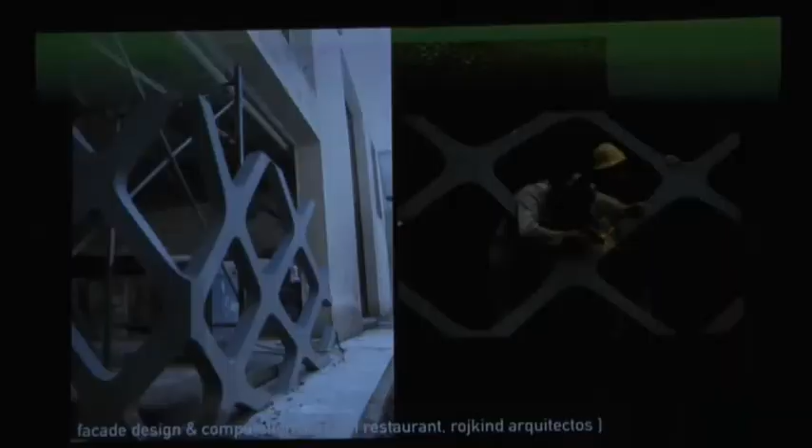For contrast, I'm showing you briefly here a few projects we've done consulting to Rojkind Arquitectos on, more geometrically focused scripts. In this case, these are developed by algorithms, but these algorithms could be interchangeable for parametric models. I'm not actually talking about this stuff today.

So these models are operative in the sense that they design through the model. They find a way where they can generate form, space, while embodying certain criteria, in this case structure.

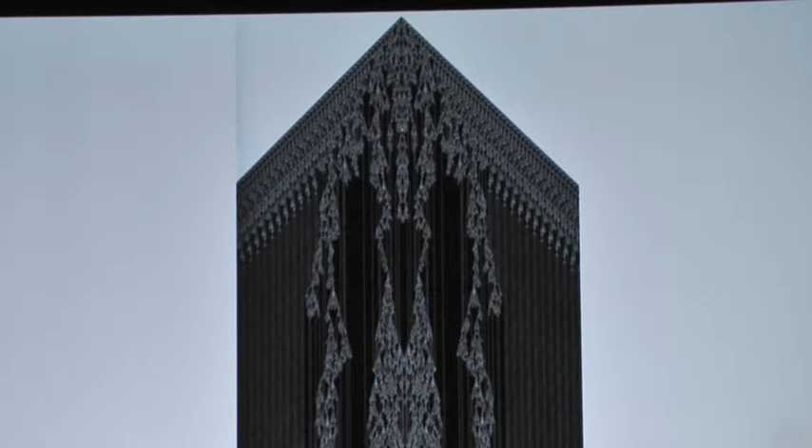When architects move towards computation, often computation is seen as a way of drafting. We're more interested in qualitative reasons for using computation, such as Stephen Wolfram. Here you look at simple rules of cellular automata, generating unpredictable results, or in this case emergence, a result that has a coherent order at a larger scale. This is in tune with the forefathers of computing.

People like Alan Turing, with his morphogenesis, demonstrate self-organization. Along with John von Neumann, they are literally the godfathers of the modern-day computer you use. Both advocated for artificial life being possible through computation. They're not interested in solving simple calculations; they're actually demonstrating that there is something creative that can be undertaken through simple procedural rule sets.

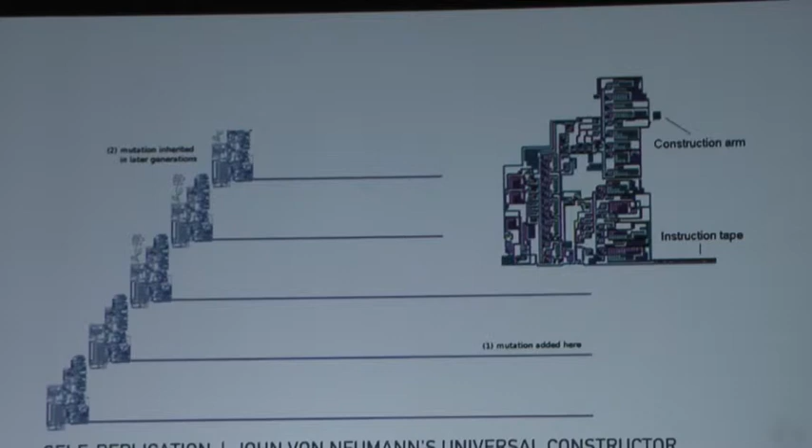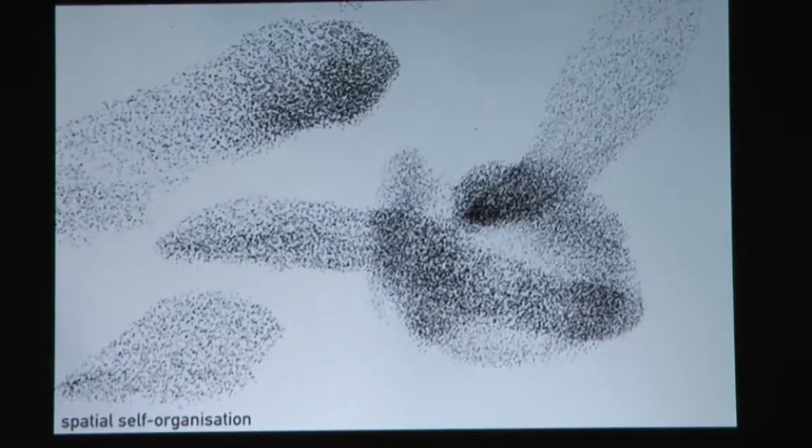The way we tend to work is more in ways where a larger organization or some generative effect is created through local or simple rules, such as you can see here. Birds operate that way, such as in Craig Reynolds' Boids algorithm. Or Eric Bonabeau and Guy Theraulaz have talked about how termites construct mounds through simple local rules as well. So these types of algorithms, I call them - the best way to categorize them is that they are event-driven.

Why I think that's really useful for design is that, first of all, it's systemically open. You can keep adding relationships, so you can deal with practical problems as well as design ones. But also, being event-driven, it's easy to use these kinds of algorithms creatively because it's a little bit intuitive. You construct events, and each event constructs something that gives rise to an effect or a characteristic in a project.

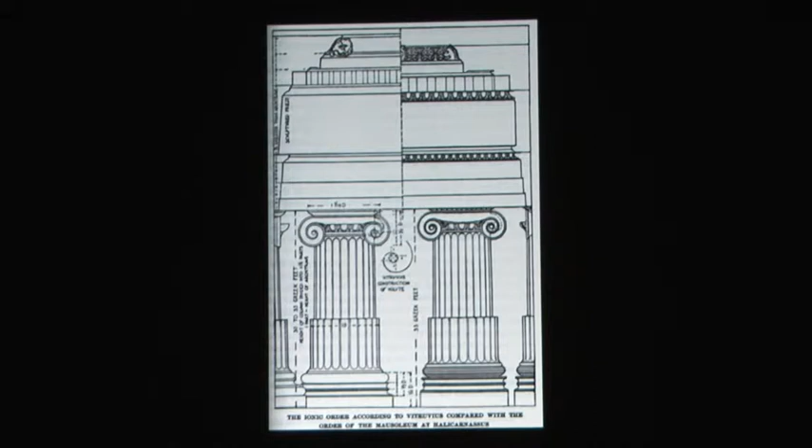So this can challenge the interrelationships of architectural elements and concepts such as proportion, arguing more for rethinking architectural production as something towards that of a complex organism.

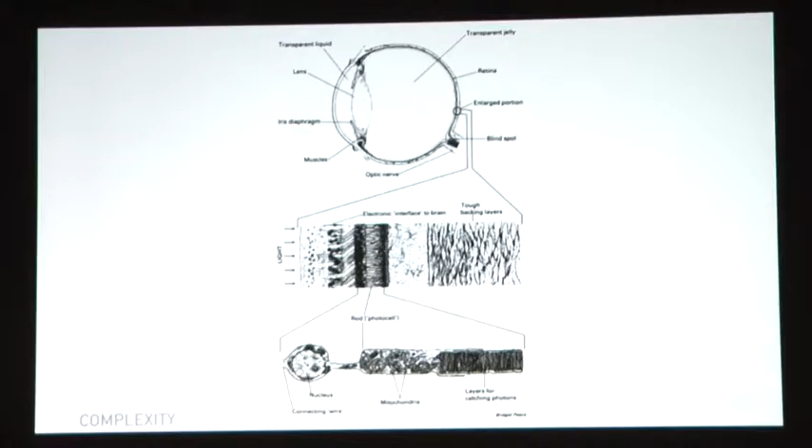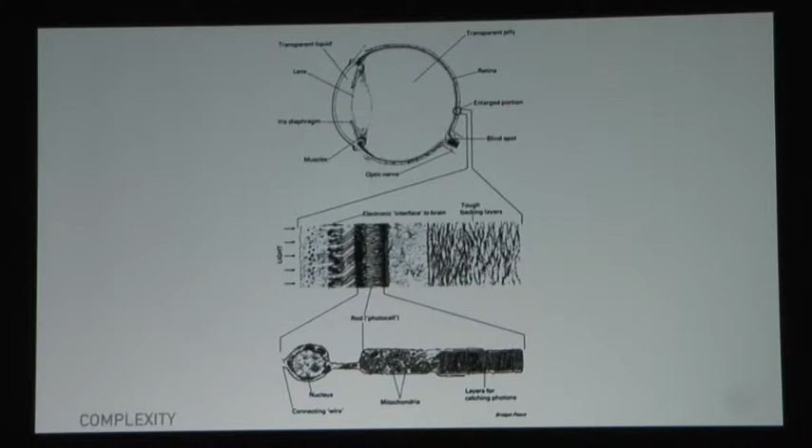Rather than thinking of complexity such as Venturi's idea of contradiction, or as something that's complex to construct, like Gehry, we think of complexity more on a number of terms, such as Richard Dawkins talking about complex organs such as the eye, being things created from heterogeneous sets of parts that perform a useful function. So they're complex because they do something. A car would operate in a similar way in that definition.

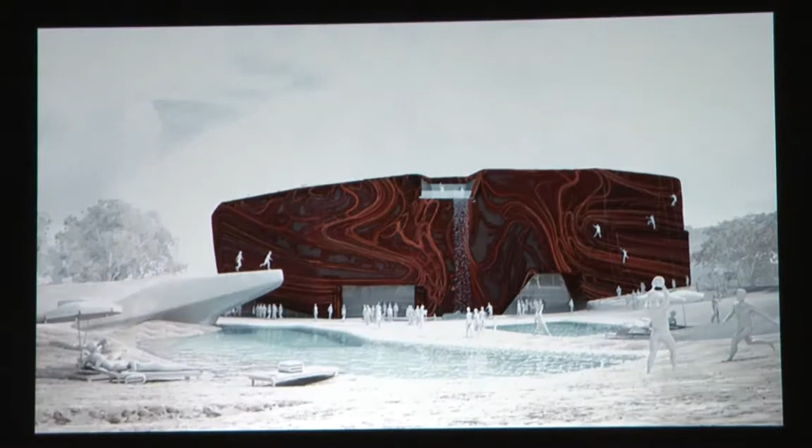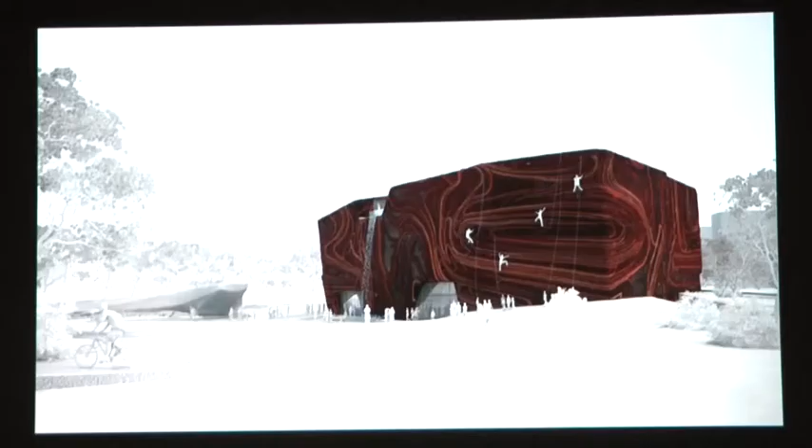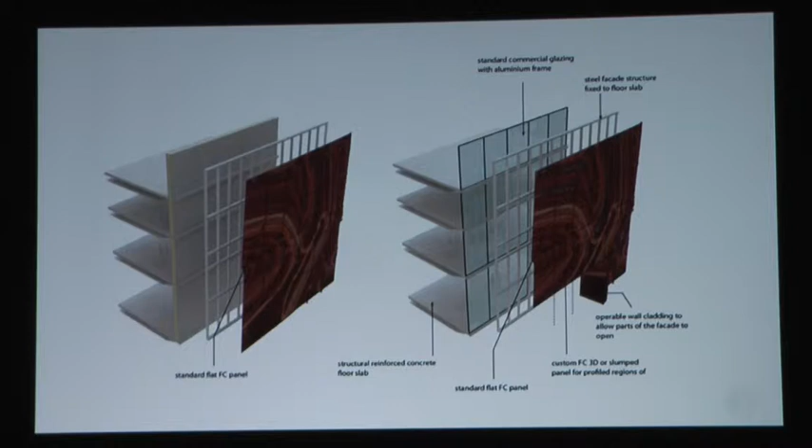Some of this is purely visual. This is a recent example, a very budget-driven competition in Bulgaria for a rock climbing center, where the idea was just to create a rock climbing terrain that had a sense of volume to it. Rather than feel that it was just applied pattern, it was almost as if you'd carved out the building from a solid. But it's really just a game of trickery with FC sheet, with the occasional panel being three-dimensional and sometimes being perforated to incorporate glazing behind.

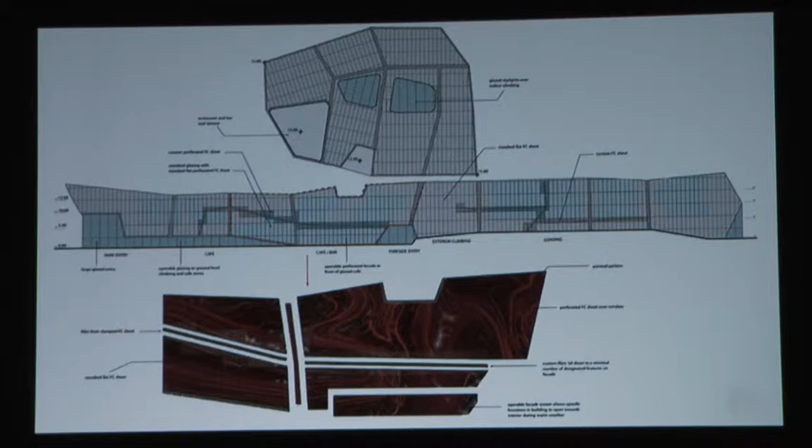So in this case, complexity is just a visual thing, but it's generated through very simple rules and rationalized into something that can be fabricated in a relatively economical way - well, per se, it's still a little bit expensive. And in this kind of condition, pattern becomes something that is related to surface but came after surface. And then continues - you'll see, for instance, even the facade carries on some of the same patterning.

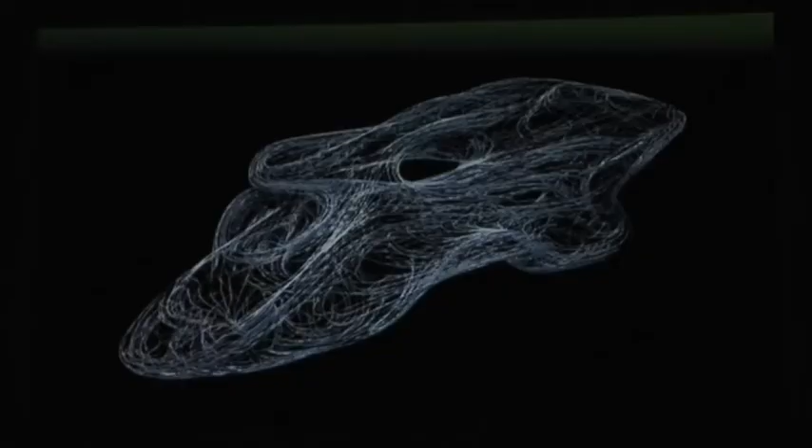Another project that uses a similar technique is the National Art Museum of China, which we did in collaboration with Studio Shupe. This was written through a behavioral algorithm, giving agency to curves that essentially wrap a series of gallery volumes. It's a strange process - the building had a 3D model, but it was constantly going back and forth between simulation and 3D model. Basically, it's defined through a series of autonomous particles in space that move, like agents. We were able to control a series of local connections through that, defining a glazing structure intrinsically related in its formation to the form and also to the envelope.

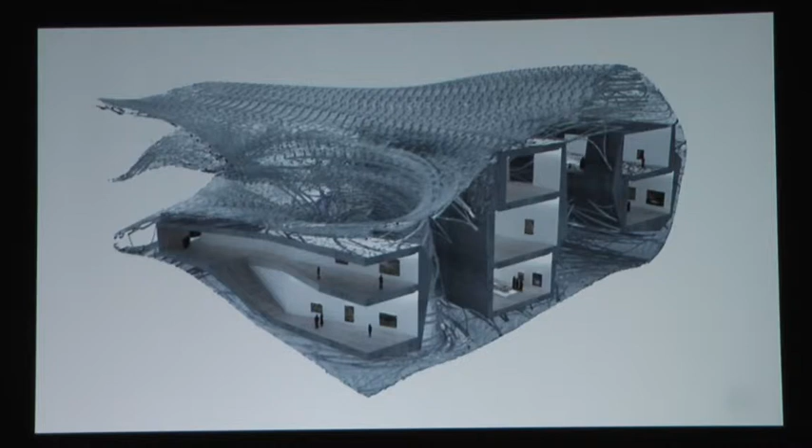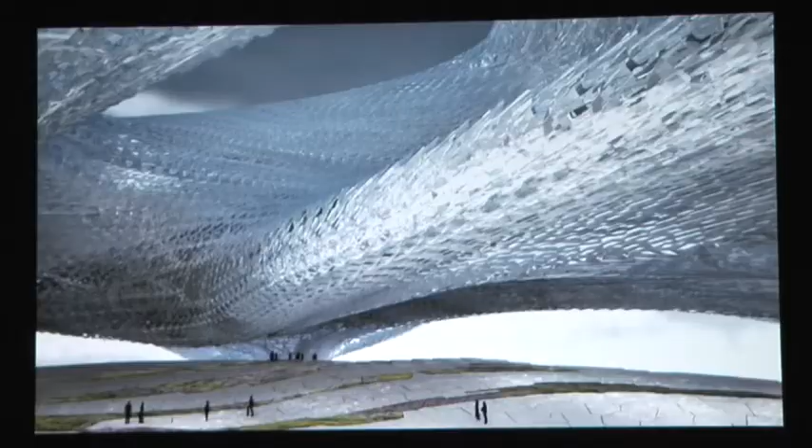What you see here is a 240-meter long building. The separation of podium and building came from Shupe. What we were trying to do was give the glazing outline a series of turbulence and variation that broke down that scale a little. This gives you an impression of the scale - you have quite large gallery volumes shrouded in glass tiles. Each tile is the same size and shape, just offset differently. There's a series of vortexes that define topological manifolds, or holes, through the geometry to enable light to get down to the podium below.

This leads into other ways we work through projects using self-organization. It's a similar thing - what we're interested in here is a series of very simple geometries. Basically, it's an agent with a body attached to it, a geometrical body, but the body self-organizing in time relative to the spatial orientation of the agent. What happens is you actually get a huge difference over time.

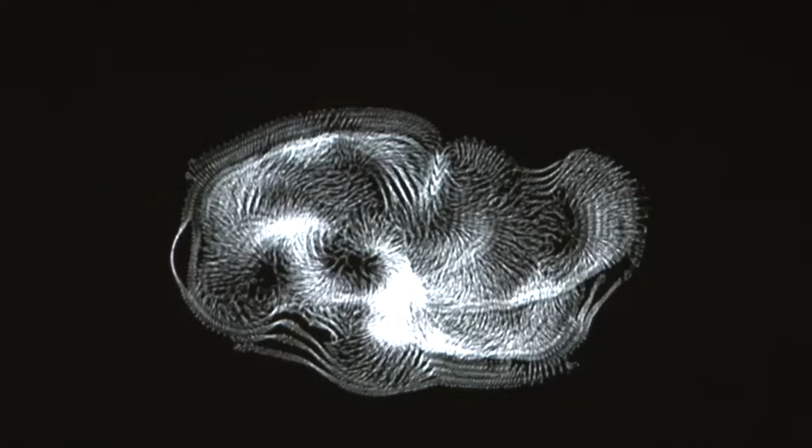There's an interest in the aesthetic of complexity, in the sense that it can bridge multiple scales of effect, and it's not reducible to the linear gradients you see apparent in other kinds of things such as parametric models, which always verge on a band of variation that's predefined.

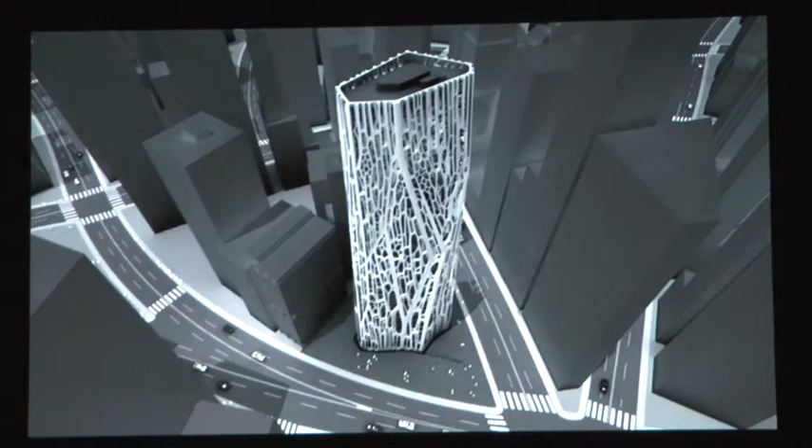We were looking at something similar here with this concrete exoskeleton, where on one hand you have a structural system based on redundancy. It's not about getting a structure to hit the ground by the most direct route - it's about giving multiple routes for any structural loading to get to the ground. On the other hand, it's also about ornament and formal articulation, trying to make these things inseparable.

Part of that project was relatively rational to construct, with the exception of that thickened area, which you can basically form with void formers from two sides. So it looks more complicated than it was actually aimed to be constructed, unlike this version.

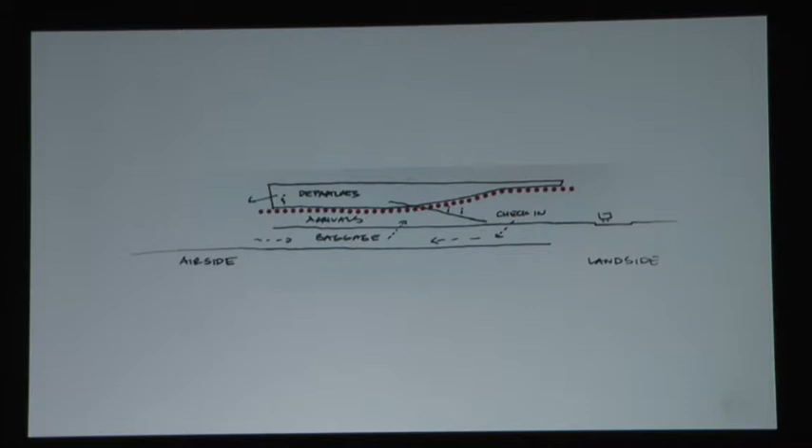This was an airport that we collaborated with Buro Happold on, where we tried to emphasize the ceiling between arrivals and departures as the priority of the airport, because we felt that in most airports, arriving passengers get neglected since the airport is normally a big roof structure you only see from the top floor. In this case, the roof has a thickening to it, and you pass up into the roof from the check-in, so the check-in is on the same level as the arrival. Then you ascend through the belly of the roof into the retail area.

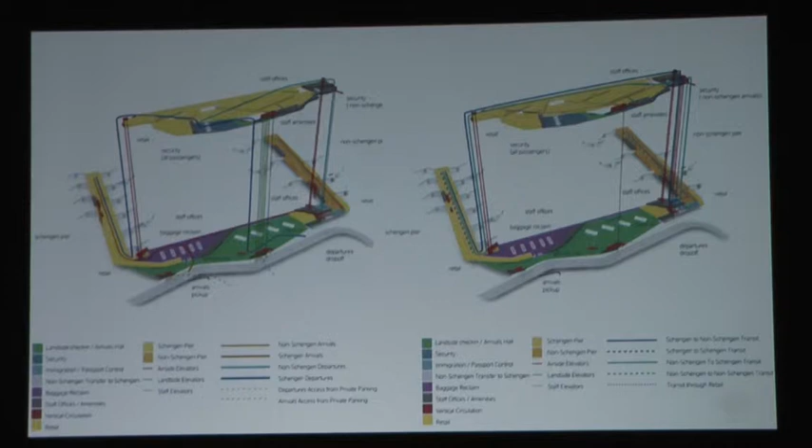It's a little bit more complicated than a normal airport, but the airport planners were happy that it was efficient enough, and it leaves unobstructed views to planes from pretty much anywhere on the arrival and check-in level.

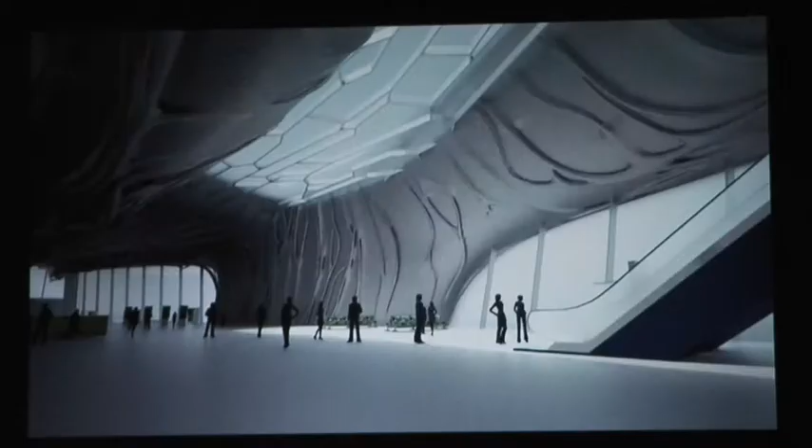And this kind of roof structure, in this case, what we're trying to do is, once again, fuse ornament and structure within one algorithm. So you have a series of strands, like with tens of thousands of agents. Basically, the roof is defined as a fibrous network, and it makes and breaks connections in real time relative to structural loading on the surface.

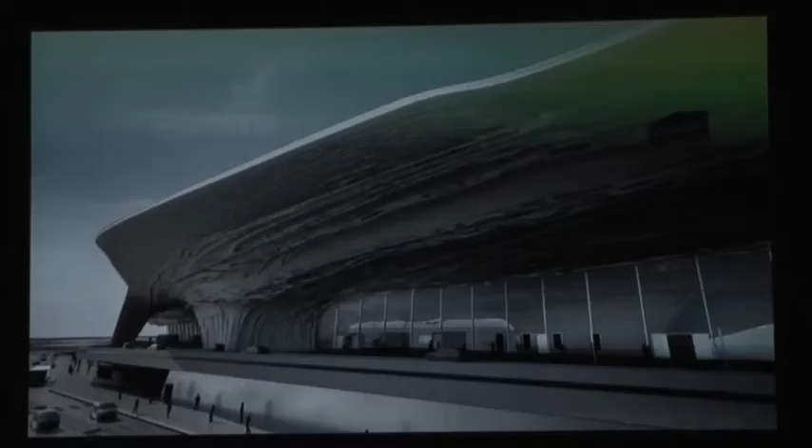So it's not optimal structure. It's actually a structure that's been predefined by a certain spatial formal condition that we wanted, and then it has to resolve itself structurally within those confines. So that's why it doesn't look like an optimal structure, but all the excess you see there is structural.

So what we're trying to do there is, once again, try to not separate ornament from structure in such a way that, if you take away the ornament, you've taken away the structure.

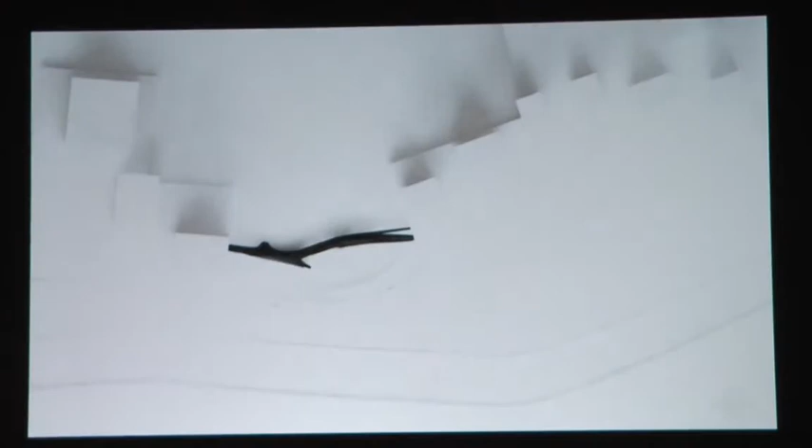Another example of this, but a little bit more smooth perhaps, is a pedestrian bridge in Sao Paulo, where we were trying to convince the client - it looks like this project won't happen now - but we were trying to convince the client to go with carbon fiber, or at least a fiber reinforced plastic, because there have been a lot of case studies done on where you could save a lot of money.

So first of all, you decrease the weight, which decreases the amount of concrete needed in pier footings. You decrease the size of cranes needed, transport, and then maintenance costs is a real potential financial saver. So you save a lot of money on maintenance costs compared to steel or concrete bridges.

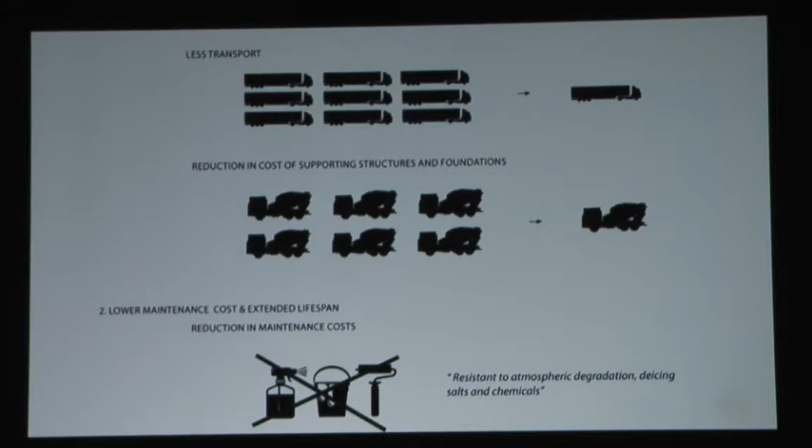But our real interest in this was to be able to think about how the formal condition, if you were to make it in carbon fiber, formal would become structural rather than just cosmetic. And topology could also become something that enables structure to be more efficient. So basically, how do you get more expressive design potential while at the same time embedding structure?

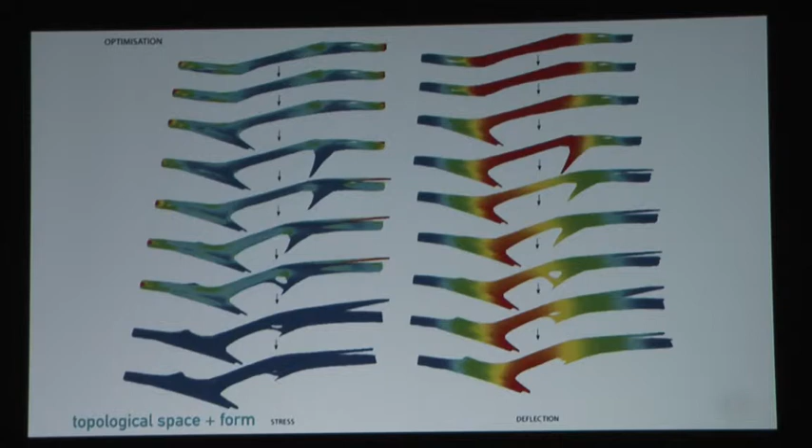So we start with a tube, and as we gain topological complexity, we gain structural fitness. And as we do that, we also articulate through micro ribbing on the surface. We start to also increase the structural fitness. So the more crazy the geometry, the less material we use.

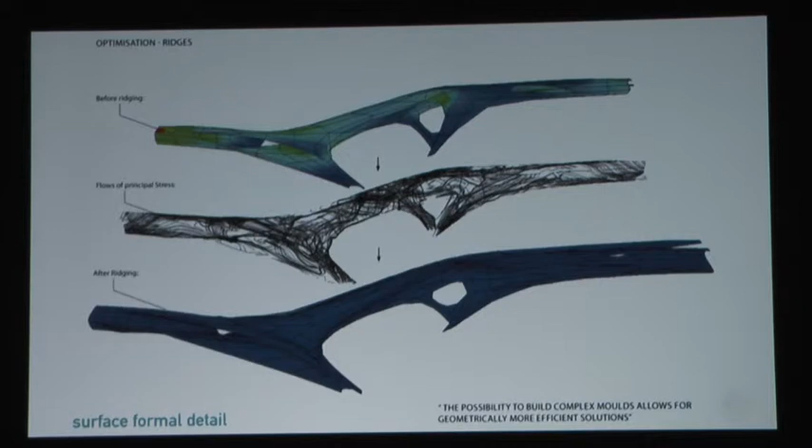And we start to then take things like stress lines as articulation value. So we could argue that more complexity of geometry led to more material efficiency. That's the bridge.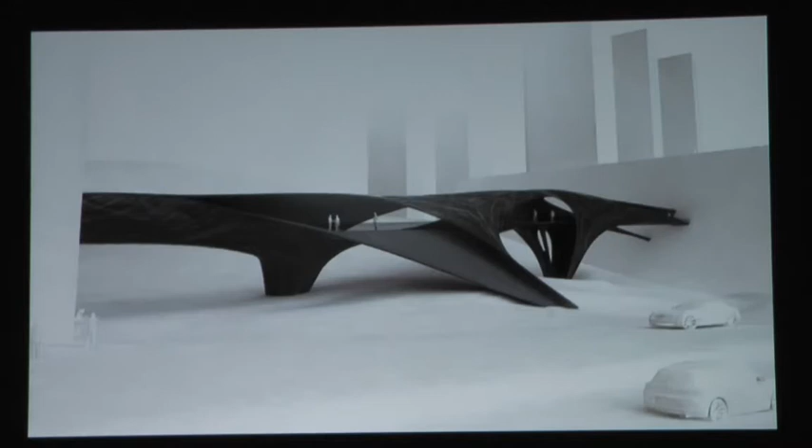It was a pedestrian bridge to connect a shopping mall with car parking space, and the car park was in a commercial office tower. But yeah, so it's actually quite thin and efficient. It's trying to increase its surface area and volume and depth at various times, but at the same time, there's nothing there that doesn't necessarily work, either for space or for structure.

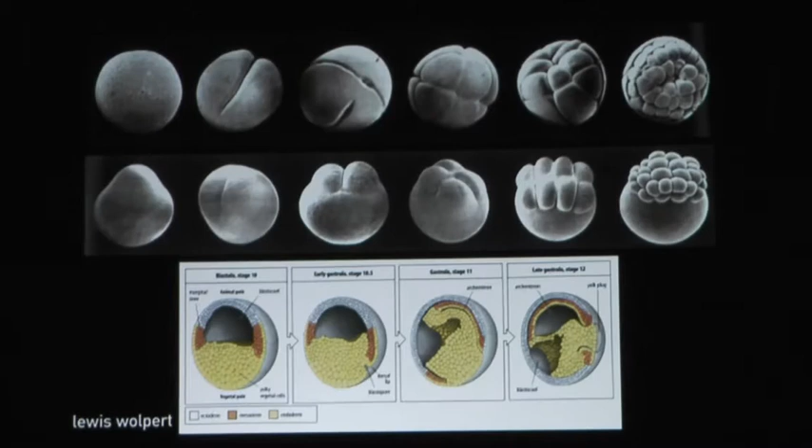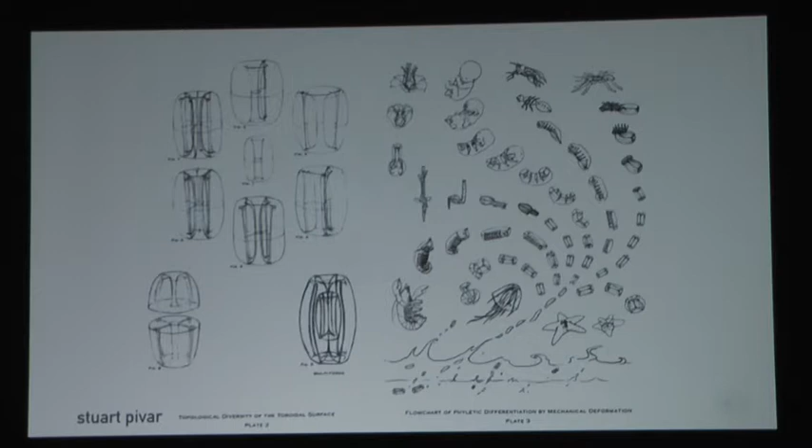So this idea of topology led also to a series of investigations, and it's tied to how we can generate topology. So we're looking at people like Lewis Wolpert, who does developmental biology, and basically embryogenesis is a topological process. We're also looking at Stuart Pivar, who has these crazy diagrams where he tries to argue that you can almost generate any vertebrate from a base topology of a double torus.

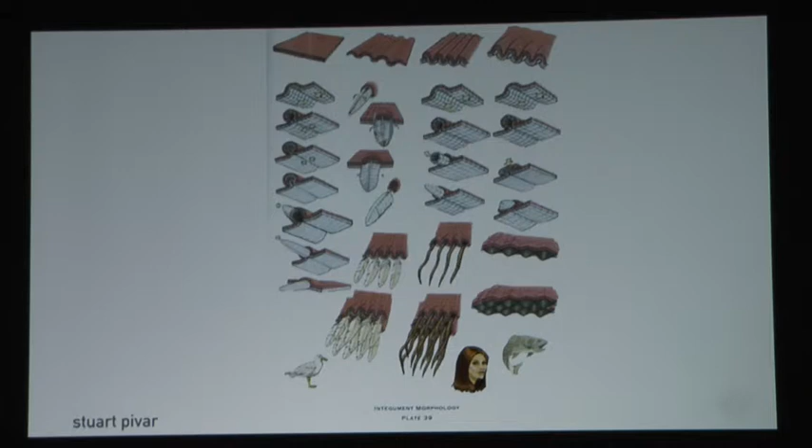And he talks about how you can generate all the articulation of a vertebrate through events that just occur repetitively as a series of procedures.

So going back to looking at swarm systems, like agent-based systems are essentially attraction and repulsion at their most simple, right? So if you have them attract completely, they collapse like a black hole. But if you give them a balance, they start to define something that creates what we call dynamic stability.

Whereas spring systems, for instance dynamic relaxation, they do become near equilibrium condition. The sphere you saw was dynamically stable.

We can also undertake topological modification, where topology is something that arises through the negotiation of a self-organizing system, in this case agents, and where color in this case is describing the surface's knowledge of what it is locally. This surface has no global knowledge, it doesn't know what it's supposed to do, but the local nodes work out whether they're on an edge or whether their job is to create a tube or anything like that.

So this is about constructing rules. Like when you see the bridge form before, there's an event-driven rule that was written to say a few nodes die, a few other nodes reach out and connect somewhere, and then there's a whole other class of nodes that have different roles to play that have to do their job to make that thing happen.

So you're talking about a community that has a series of teams with different tasks. That's what that surface is.

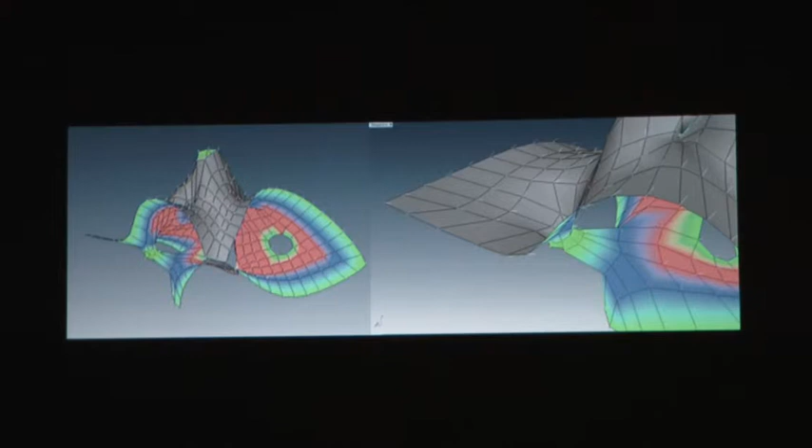And for instance, after writing that code, I ran it in a few workshops where you can see some examples of something transforming in time. And you can see in this video that's playing, we were trying to basically conceive of a series of events that could happen in time, that one thing would happen in response to the thing before it.

So this is just a snippet of a whole lot of videos, but it's trying to think of the generative system as something that's more of an ecology of sorts, where multiple things are negotiating in response to each other. There's no design goal for that.

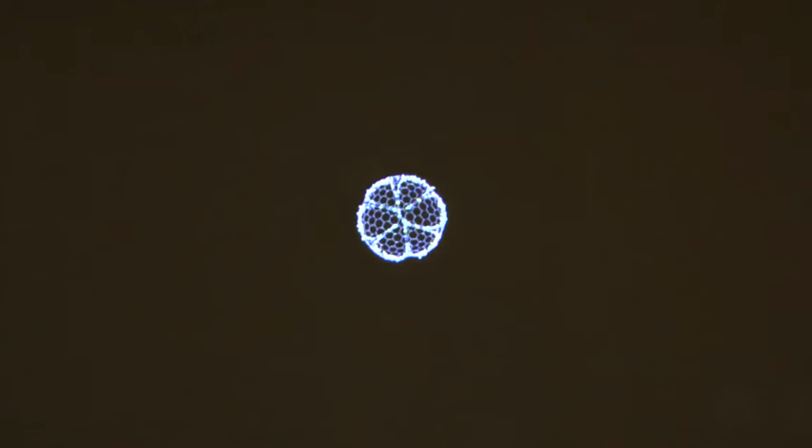But if you take that, I think there's another version of that here. You can see another one here. So basically, every time you see a color change, there's a rule change happening, and everything's just locally organized. Nothing has any global conditioning. But in this case, there's an attempt to try to control some form of geometry through it.

And it's just constructing one rule after the other.

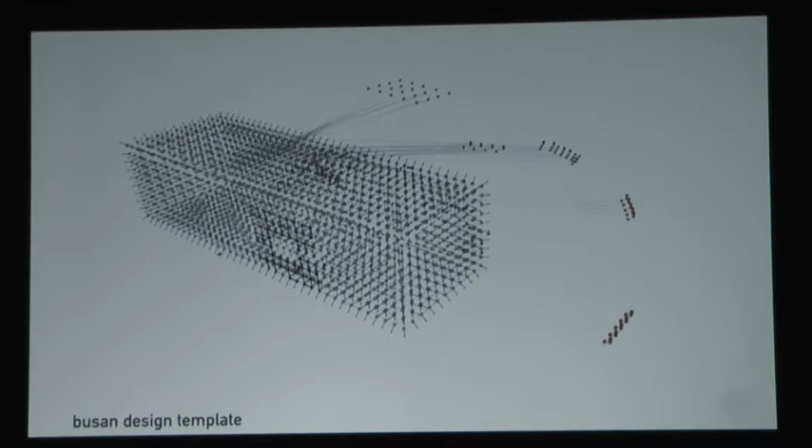So using that kind of methodology in a project, we can go completely bottom up. We've done that before, but we can also put in some top-down constraints or some starting conditions. So in this case, this is what I call a design template. It's like the input in which to generate something. And in this case, that's the result.

It's a process similar to embryogenesis. The template starts to transform, subdivide, it folds in on itself, it bridges topologically, it does all these strange things, and as it does so, it undergoes a lot of changes.

It looks quite deterministic when you see it, but this project was a pain in the ass. This took 3,000 simulations. You're going to hate me for saying that, it's not worth it when you see it. But 3,000 simulations, each time writing different code, as well as changing design templates and things.

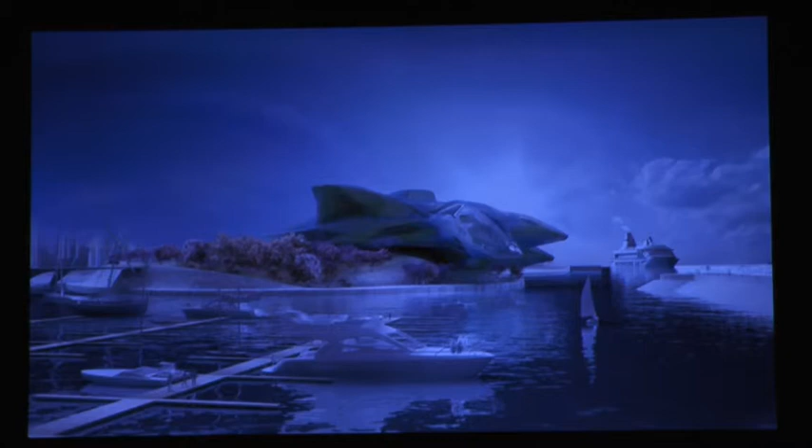But the thing about it is that all those details you see, like the collarbone-like things on the left, or the ridge on the top, they're intrinsic to the formation of the overall result. They're not something that we had a model of the geometry and then said, okay, let's add a ridge here, a collarbone here, or whatever. Not that that would be a problem, but I think the interesting thing is it's actually those things that are the telltale signs of how it formed in the first place.

Because what happens is when a series of agents or nodes on the surface kind of pinch like that, that's caused a tightening that's caused the whole surface to pull in a very particular way. So it's actually, they're the signs of something local that happened.

In this project, the idea was a ceramic skin that would have glazing progressively transferring across the water, like you can see here.

But the main interest in this project, more an exploration of the research, was the character of the surface in relation to the way it was formed—things like muscular toning versus tendon-like qualities.

And these things, or in this case the auditorium, which unfortunately looks a bit too Zaha—anyway, the point is the opening there caused a tension that sucked the whole surface in, and that's why you see all the wrinkles. It's all part of how it was generated. It was actually supposed to look a bit like this.

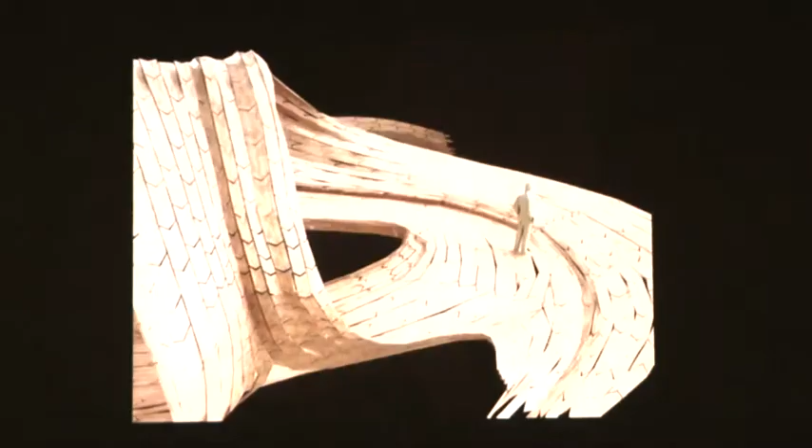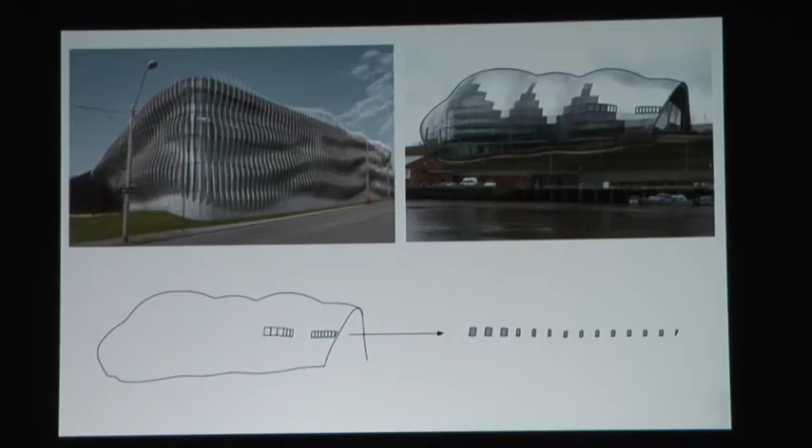Before we had glass tiles, we were also looking at metal tiles or metal cladding elements, trying to challenge this problem where you have a weird surface and have to break it into lots of different parts.

We were thinking more about the fact that you can have interesting difference with parts that are all the same. I ran a fabrication studio in St. Louis where we took that concept.

We were looking at structural surfaces by people like Musmeci, or Frei Otto or Candela, and critiquing them on the fact that although they perform well structurally, there's something quite reductivist about them as a design—I would argue there's a lack of expression in them.

So it's more interested in how you mess with these properties, like how you mix post-tension compression with cable net suspension and drapery—how do you put a bit of Bernini into Frei Otto, in a sense.

Think about how materiality can be something that is just local—not like, let's make something really supple so it can't do anything, it's completely useless, and then organize it so that it does something useful.

So this is the design drawing for this installation experiment. It's the only drawing we need, and it describes how one element is connected to another element.

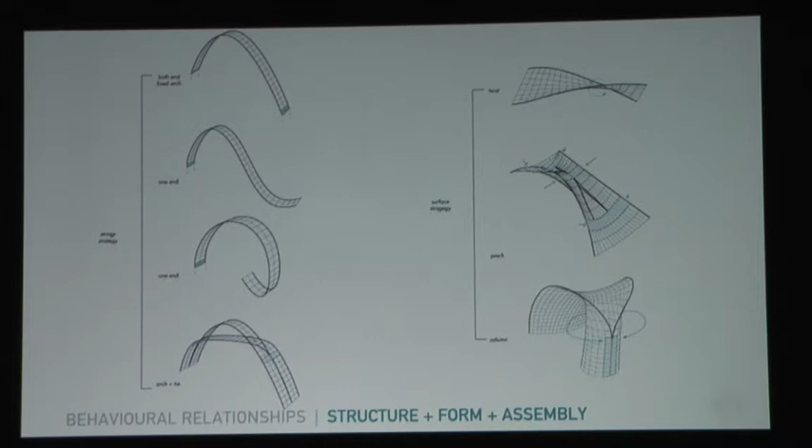It actually translates into procedures like these ones. Basically the whole thing is like the thing in the bottom right, where when it forms a tube it stands up, and when it doesn't it collapses, because all the junctions are loose in every direction.

So we started by looking at how we could create a ball joint in one direction, and a slotted connection in the other. This is two axes of cables with plaster models just as a prototype, so we could start testing the same elements doing all kinds of strange things.

So here you see they go from surface to strand, from tube to surface to strand, and at times they can hold themselves up, other times they become completely floppy.

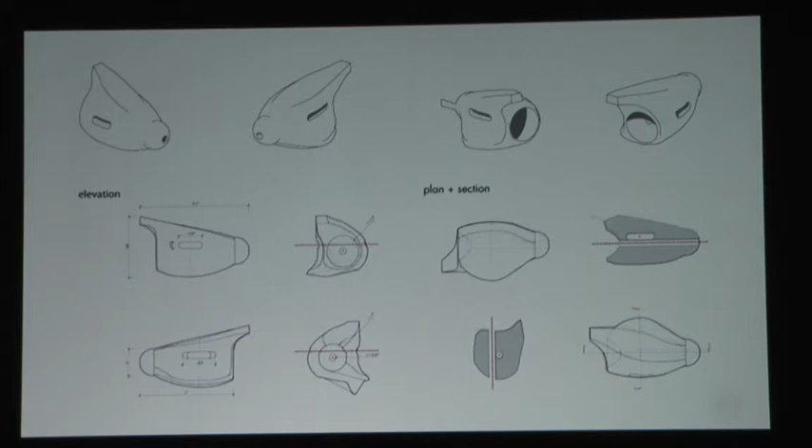To do this kind of thing, the actual base geometry became important. What we could define there was what would allow these things to happen or not happen—so there's a series of curvatures and slots that allow for different rotations to occur.

This is the final pieces, and you can see here that they interlock, and their curvature means that anytime they slide, they're going to reorientate in angles as well—so they're always shifting in orientation, which is deliberate.

And that's the final thing. It's a little bit ugly at certain angles, so I'm curating these photographs.

But you can kind of see, as I said before, this has no structural qualities—that's not the point so much. It's incredibly heavy and it was difficult to build, but it is what it is—the assembly is the creative act.

So assembly here becomes generative—if you connect them in a slightly different way, you would get a different result.

And you can see where it collapses on the other side when you open it up.

This principle was looked into in a slightly different way in the Helsinki Central Library competition, for a blank site next to Steven Holl's Kiasma Museum and the Parliament House. This time it was an attempt to embody these ideas in a way that's a little more finished.

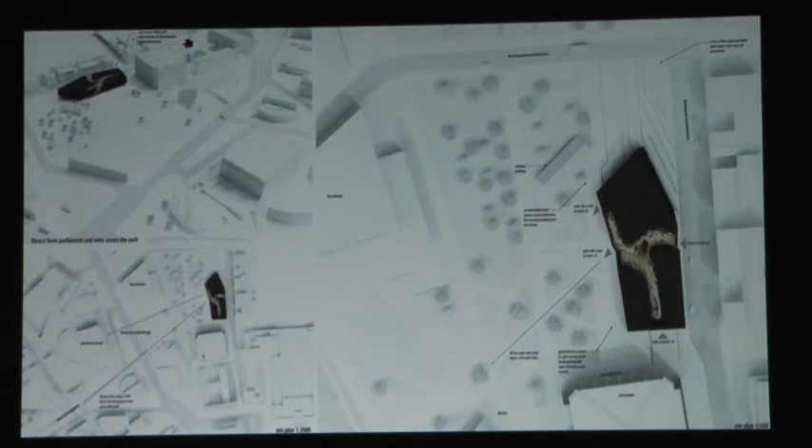This was dangerous ground, and I'm still considering it. I think it's a little too minimal for me, but it still has some very interesting properties. There's an attempt at working with the context, rotating towards the Parliament House, opening up, aligning to a heritage-listed building and to the city grid, then opening up towards the park.

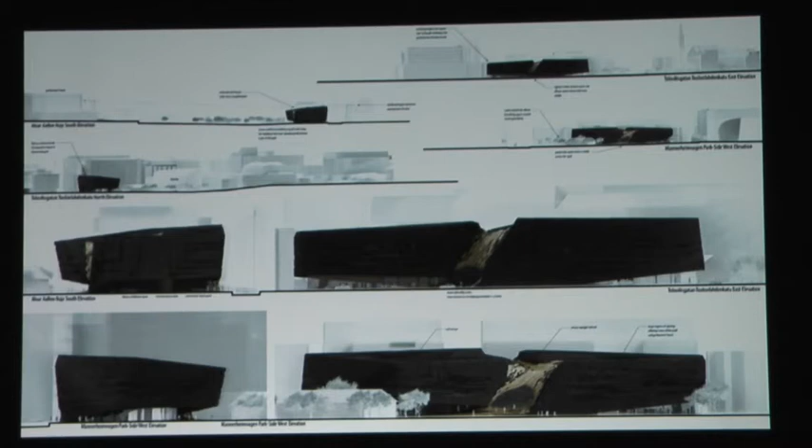It's a pretty compact building with all the typical environmental considerations, I won't go into that. But basically it opens up towards the park, and I'll go into the surface logic in a second. You enter at level one from the park or from the ground level on the street behind.

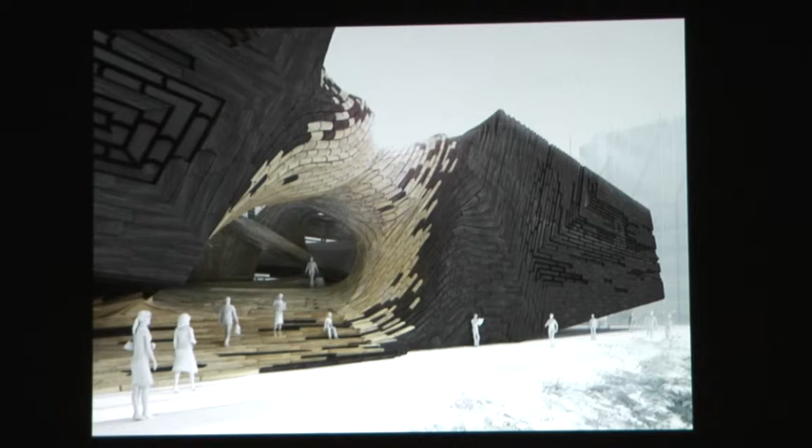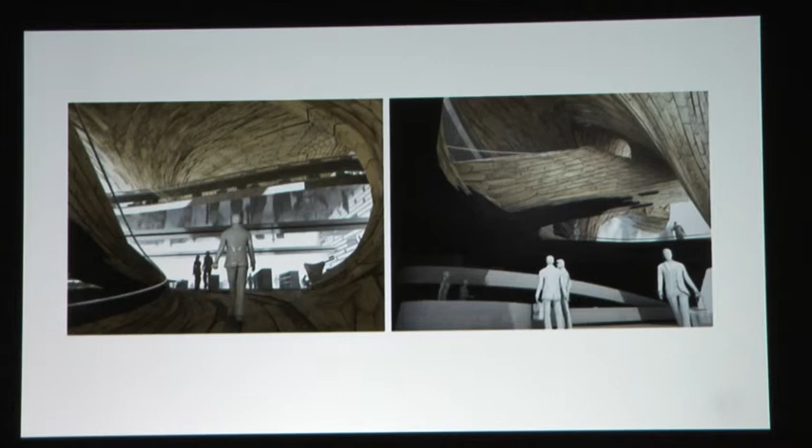Everything revolves around this surface, which I'll come back to, which operates as structural support at times, as ceiling at other times, and as circulation. All the elements orientate you toward where you're going. This surface forms an interior street and a stair up from the park side, then starts to wind you up through the building.

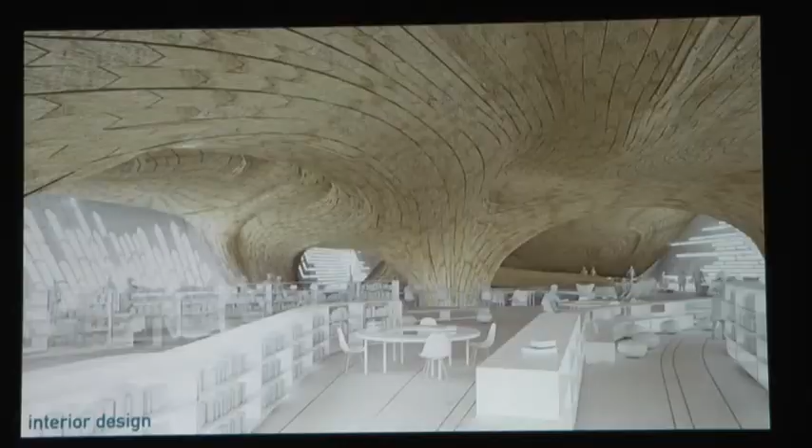All the furniture is kind of modular. That's the ceiling above that floor, and you can see where the ceiling comes down at the back, which is where you see the auditorium on the right-hand side. This surface is sometimes arching, becoming post-tension compression, and other times it's just a suspended ceiling, not doing anything structural. Here you see the modular furniture on the floor.

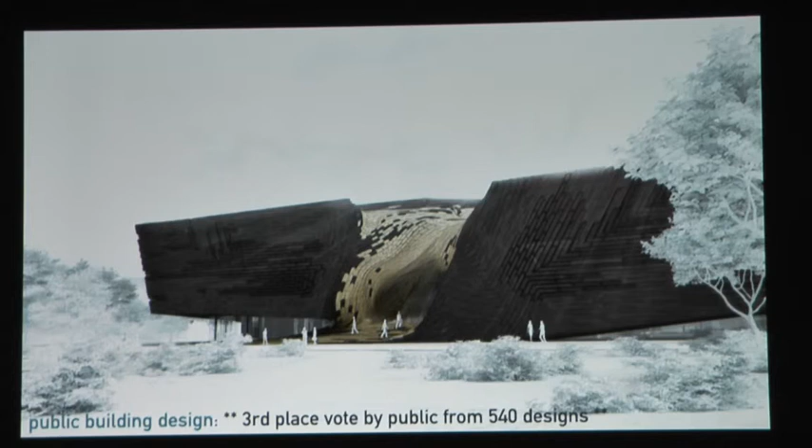The thing about this is, on one hand, it looks like a pretty regular project. On the other hand, it has these quirky moments, like warps, ripples and ridges, where you see a bit of black and yellow timber. These are coming from this surface in the middle.

The idea is that the way the material is organized allows it to do different things at different times. Sometimes it's post-tension compression when it comes down as columns, where the two atriums are, and it arches between those as post-tension compression. There it's self-supporting, not supporting the building.

But then it's suspended to create a ceiling on the reading level. The interest in that is it can guide you as a vectorial space, giving a visual kind of link, but it also provides a level of scale or richness to the project beyond the scale of the building itself or elements such as windows or furniture.

But there's a finer-grained detail that leads to something else. So in this sense, it's material, but it's also a material order or material scale, doing something at a larger scale within the building.

This work is still focused a lot on formal, structural and ornamental considerations. But what I've been running in the DRL studio the last few years is to open this up into a bigger agenda. If you look at this as practice work, this is student work from the DRL, where we're still focused on materiality and material order at small scales, but we're looking at building life cycle.

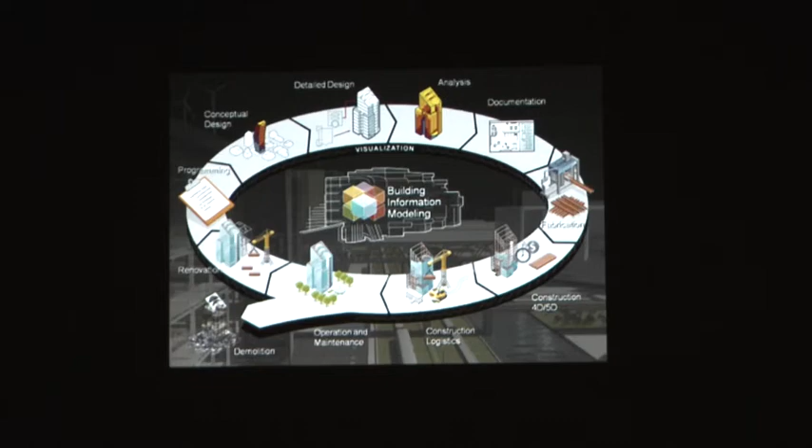Thinking about building life cycle not like Autodesk's image here, but as something where we can rethink aspects of building life cycle. We can think about formation as a time-based process, think about temporal cycles within buildings, be they economic, environmental or social, and speculate on different tectonic opportunities that can allow for architectural opportunities.

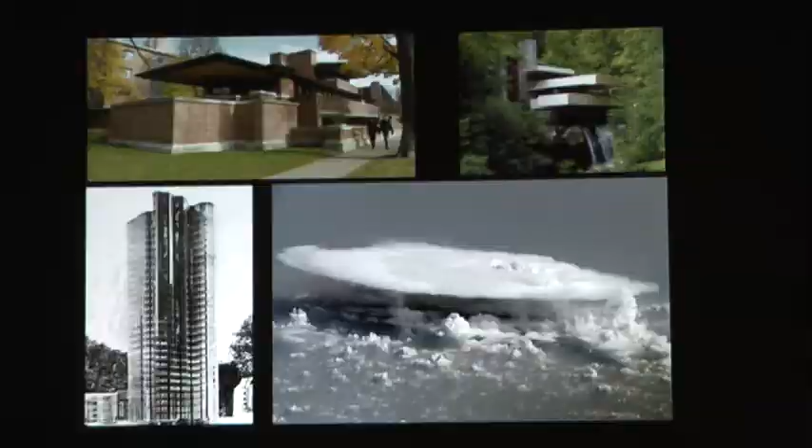In all these projects, similar to the practice work, there's a level of detail required, and a certain level of computation that's just embraced as part of the problem—not for its own sake, but for the end results.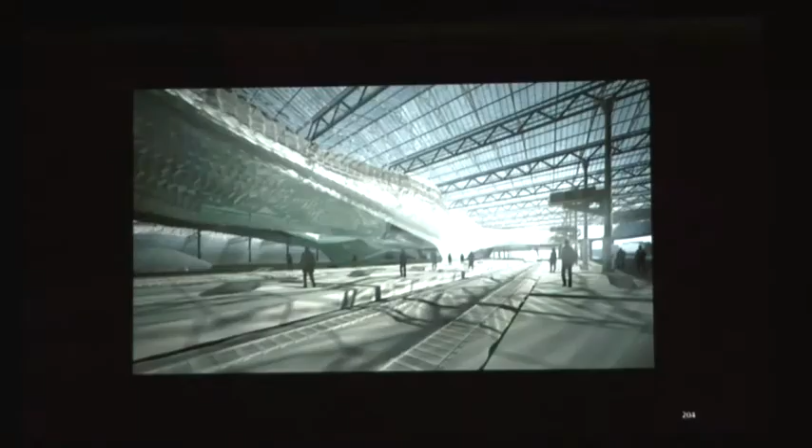We're also looking at generative assembly, ideas of generative fabrication, even sometimes really simple ideas. In this case, it's an experiment: can you use the last element you cast, say in concrete, as the formwork for the next cast? If you do it progressively, you can start to generate all kinds of complex curvature.

The difference between these two is one of overall form, but it's also one of detail, and that detail gives you a hint of the history of how it was actually made. So it's an idea of embedding within the fabrication process qualities that come from the way it was generated.

It's similar to this example in a workshop we did, where this pattern, when you let it go, generates this, just through simple relationships of tension within wire and also tension within lycra, playing off each other. So there's a fight between the two materials, but one that's not equal.

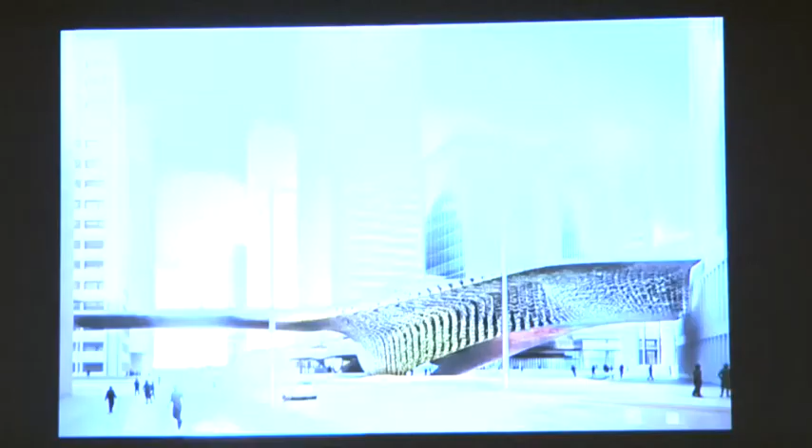We can speculate on these kinds of things in larger projects, such as this habitable bridge, which considers fabrication and assembly as things that can be really worked through as a design problem.

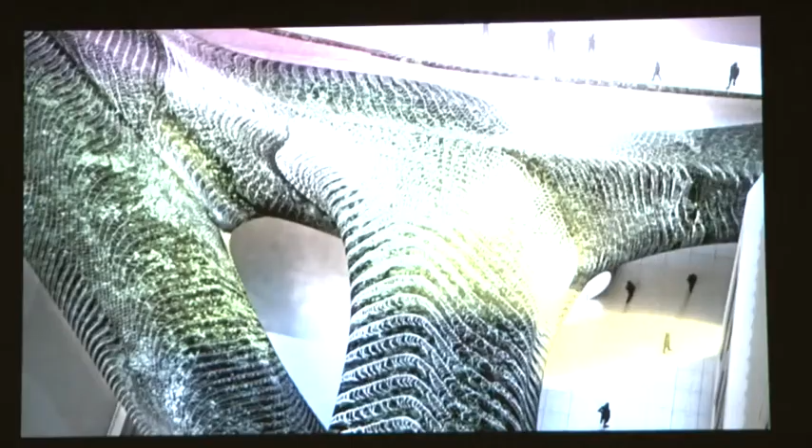In this case, it's using fiberglass, where by unwrapping parts of the project, we can integrate everything—handrails, stairs—and the actual fiber placement takes on both a structural role and an aesthetic role. You'll see it has patterning and segmentation, things that are both aesthetic but also intrinsic to the whole production process of the project.

The project is fabricated in unwrapped fiberglass parts that are then hung. We use digital simulations in the studio in DRL, as well as physical models like this one. The whole project gets unwrapped and is designed as a series of prefabricated parts, basically delivered to site unwrapped, then hung on site in a scaffold and cured with resin.

Then they're assembled without scaffolding—each part is designed to hold the next part. This was worked through with AKT structural engineering as well, to the conceptual level. In theory, we could cantilever huge chunks of fiberglass just by designing the way one part inserts into the other.

So this kind of render becomes part of the project. I would say that kind of render was just as important as this render, in the sense that it's communicating the logic behind the project.

Similar things we've worked through with cutting sheet steel and aluminium and inflating it—I won't go into that too much. But it's both a technique-driven way of generating space and form, as it is a way of rationalizing material.

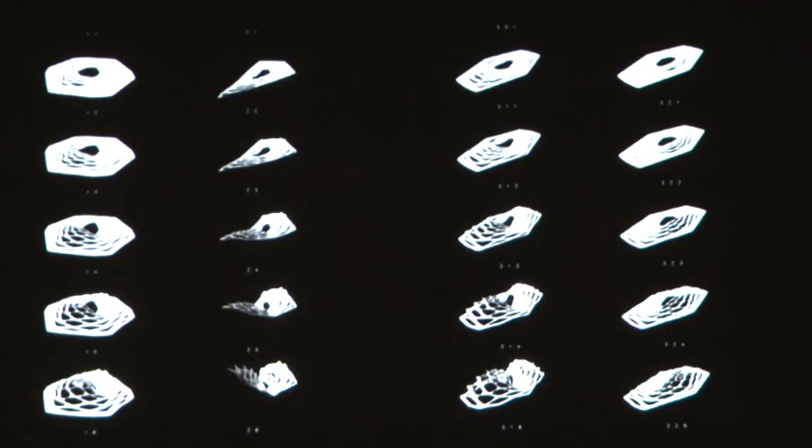In this case, trying to argue for mass production using just sheet steel delivered to site that was then inflated on site. This was a housing project, and it involves thinking at multiple scales. So even at the level of, here they're describing apartments, you can't separate their planning from their material articulation and their structure.

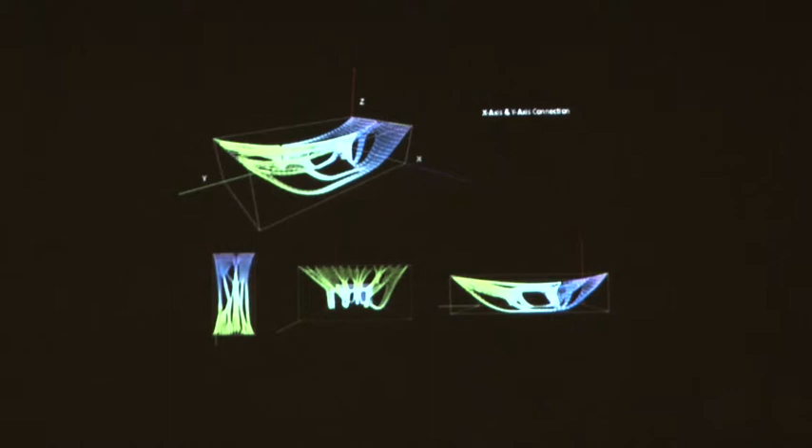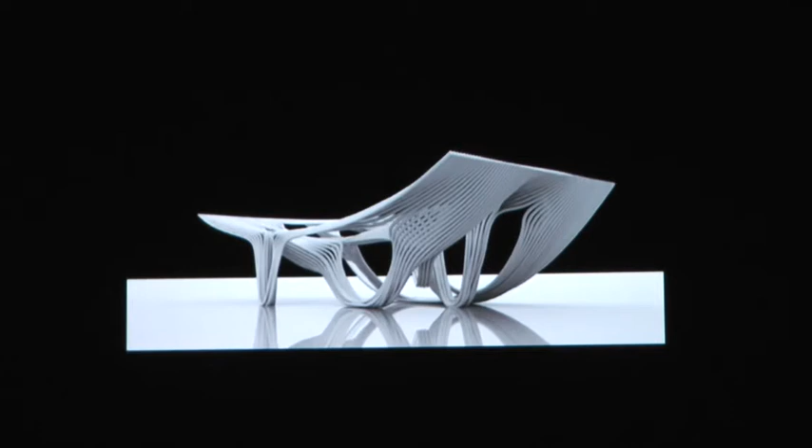This also pushes into ideas of generative temporalities, where we work with things like mushroom mycelia fungi, considering relationships between mushroom and rice, and how mycelium fungi can bond with a substrate such as rice hay. We work out logistics for structural support for concepts like this, using an agricultural tube of rice hay, an off-the-shelf product, and developing it into something self-binding and self-supportive with the mycelia fungi.

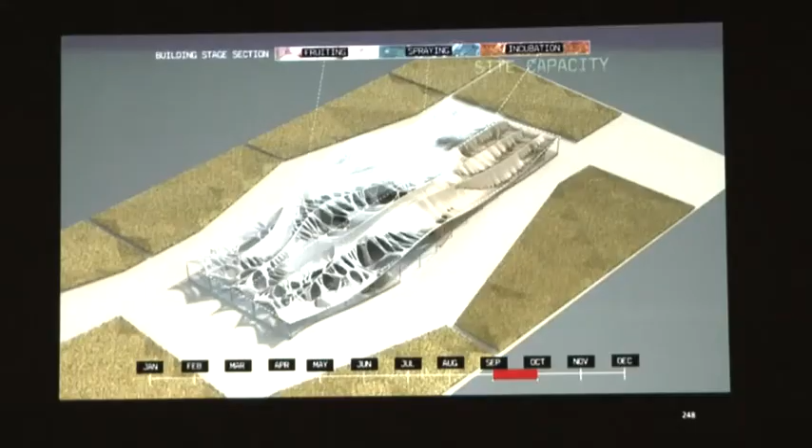This is an example of how they work through the project, where the size is based on the production capabilities of the site, like how much rice hay and mushrooms can be produced, and how that gets staged in time. The project gets rebuilt every year, within a window when they decide not to produce rice, and it's built in stages - as one part is growing mushrooms, the other part is getting demolished.

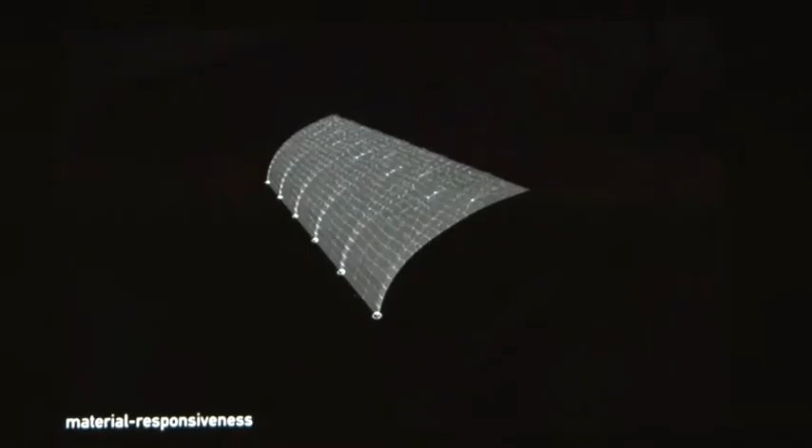These kinds of logistics move into things like water control. We have surfaces that absorb water using hydrogel, and we can redirect water over time just by controlling the weight of the surface. So as an envelope, for instance, it stores water, but at a certain point it could redirect it.

These principles have been worked through with erosion as well. Students had to develop their own computational models of erosion to do things that weren't easy in off-the-shelf software, such as water tracking on the underside of a surface. You've probably had to detail drip grooves in construction class - water always runs on a horizontal surface and sticks to the underside because of surface tension. In this case we want that, so we had to simulate it to regroup water over time.

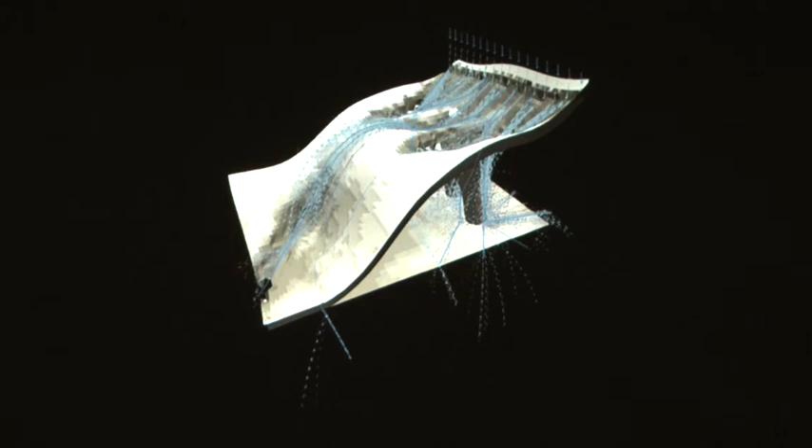So as a building erodes over 12 months, when it gets to a certain season we can change where the water running on the roof goes at a particular time of year. To do this we work through scale models - this model was eroded over 6 months. The students set up a rain machine at school that ran 24 hours a day for 6 months, and they developed simulations so they could speculate on things like a public bath building in Sao Paulo.

The interesting thing is that the building is designed to survive 10 years, and one part of the building is designed to be rebuilt every year, so it becomes porous.

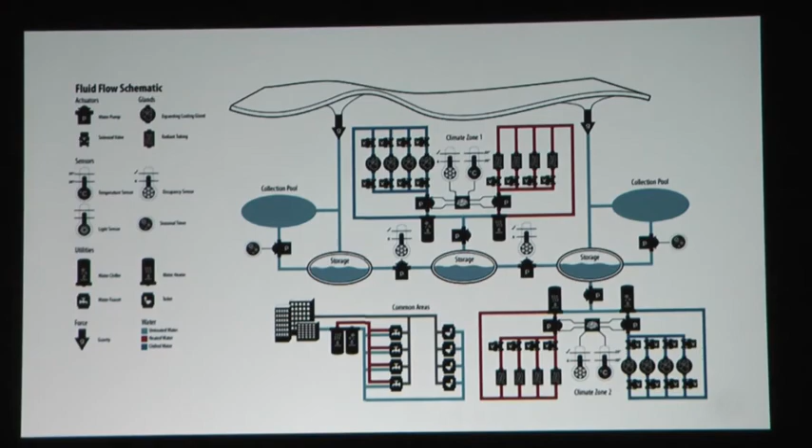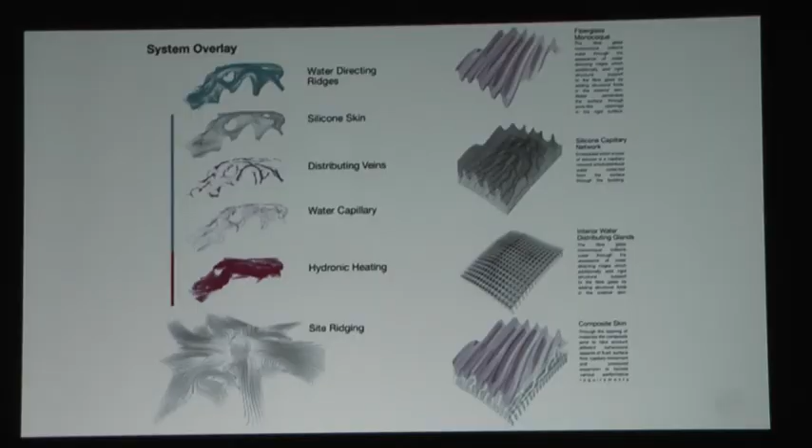Other projects have looked at the relationship of water collection and distribution in relation to structure. Here you see a system working on how to distribute water across the surface so it can be absorbed evenly, while also playing that out against structural concerns. The most efficient structural arch would be a steep one with a small span, but the best thing for collecting water across the whole surface would be a shallow arch with a wide span. So they're playing off these contradictory scenarios and working out how to embody them within tectonics that they prototype, to design a building proposal that collects water over time and redistributes it in different times of the year.

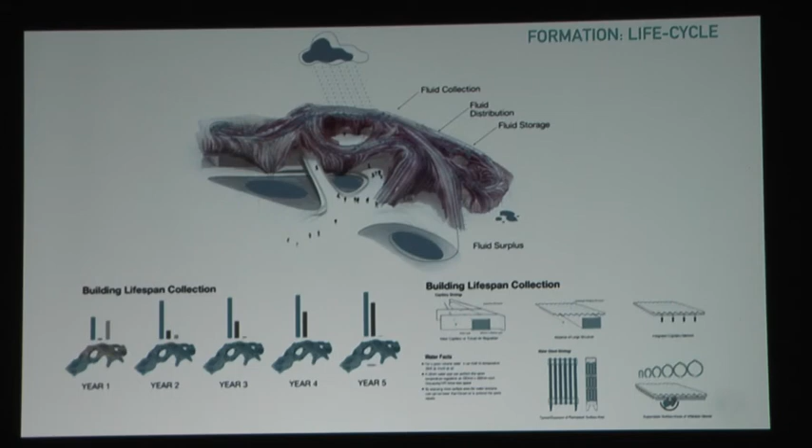And once again, the ornament of the project, or the visual interest, is related to the practical aspect of the project, and that works at a greater level of detail.

Maybe the last thing I'll show you, which is a little abstract, is going back to think of these things through materials. This is playing out with the surface tension within silicone and wire - it's an inflatable thing working at regulating water and air. Nothing in it was actually designed beyond designing the fabrication technique, so it's about gaining levels of sophistication in what we can make by engaging with the materials as well as computational processes. All the ribbing and fluting and the way it distributes fluids is just part of the way it was made - in order to create some of these things, we're trying to create the way we make things as well.